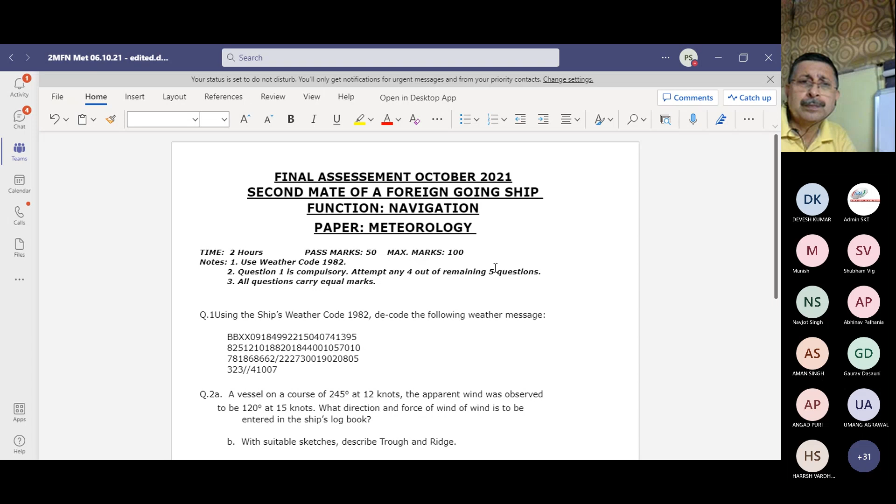So what you'll do is in your exam, you will click on this once, just one click, and your paper will open up. Like this. Can you see the paper? Yes. Right. Yes, sir. So, okay.

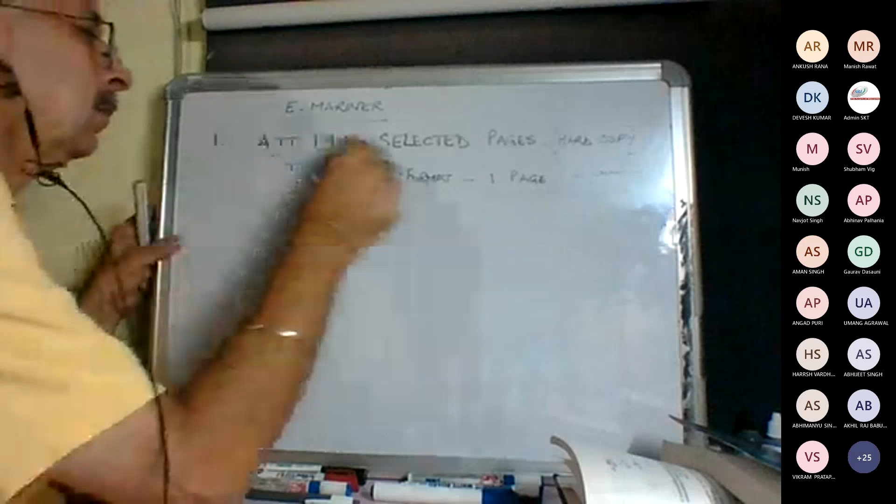Okay? Is that okay with everyone? Yes, sir. Anybody has any doubts or anything? Anybody any questions to ask? Please feel free. We have about 5-10 minutes to spare, so we can spend that time on some discussion in case any of the October batch or September batch have any questions.

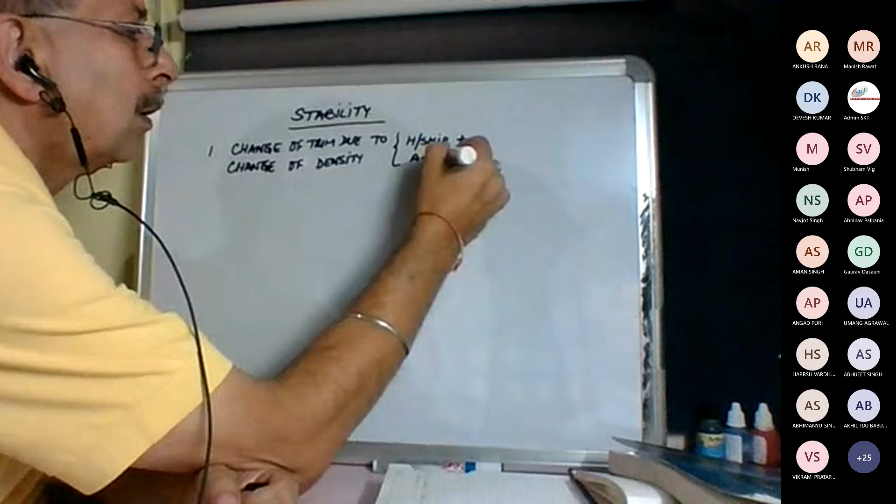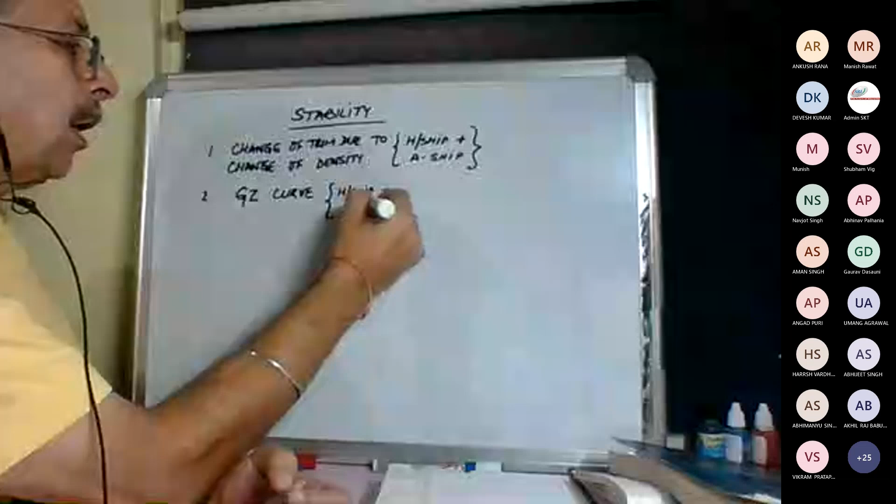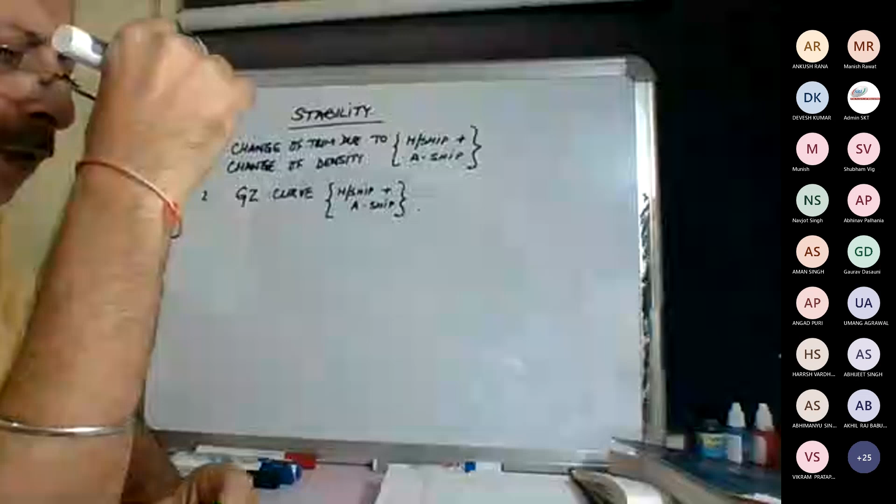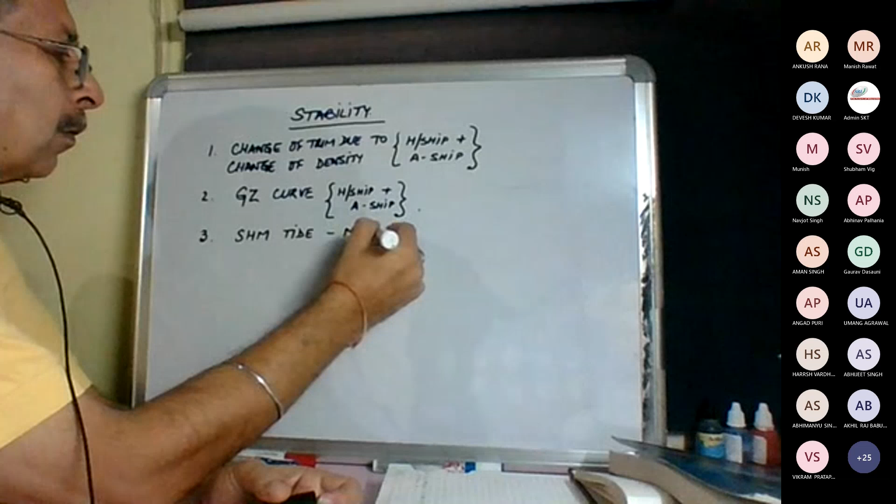And then we will have, in the MET paper, the SHM tide topic. This will come in the MET paper as a compulsory question.

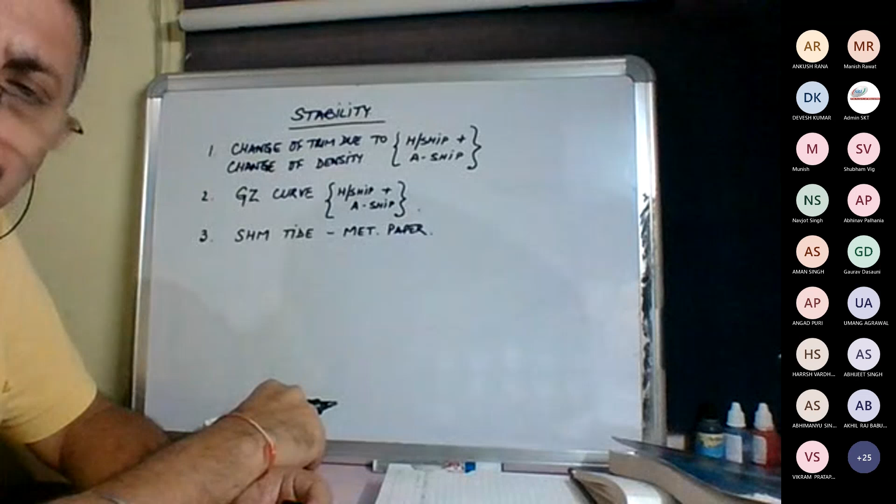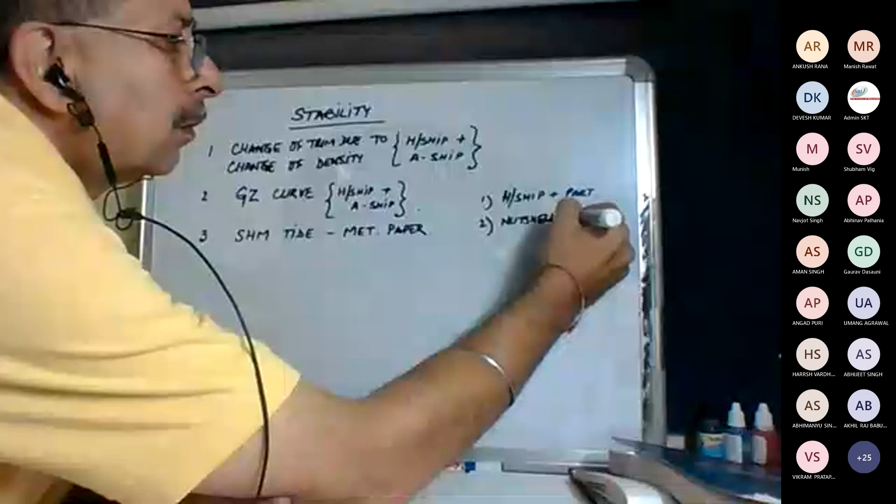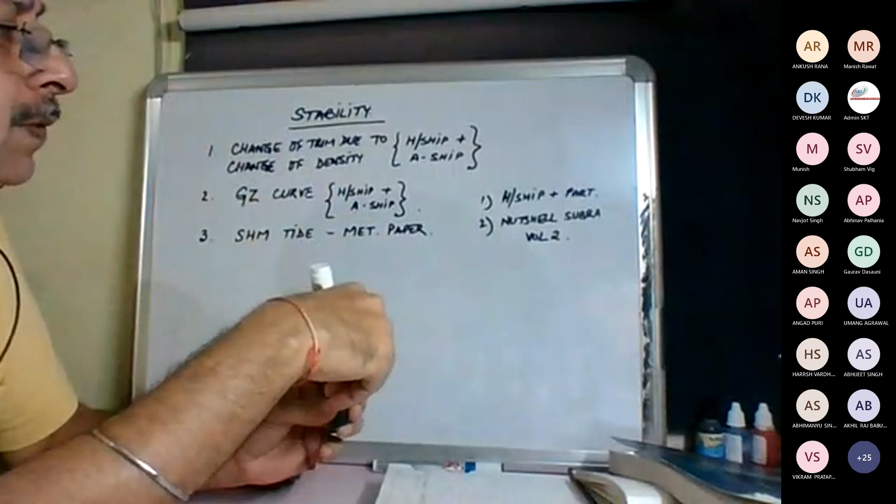These are the books that you need. Keep writing the notes as I keep giving you for both of them - I'll be giving you the notes. For Tide also, I will be giving notes. So this is how we are going to follow the sequence.

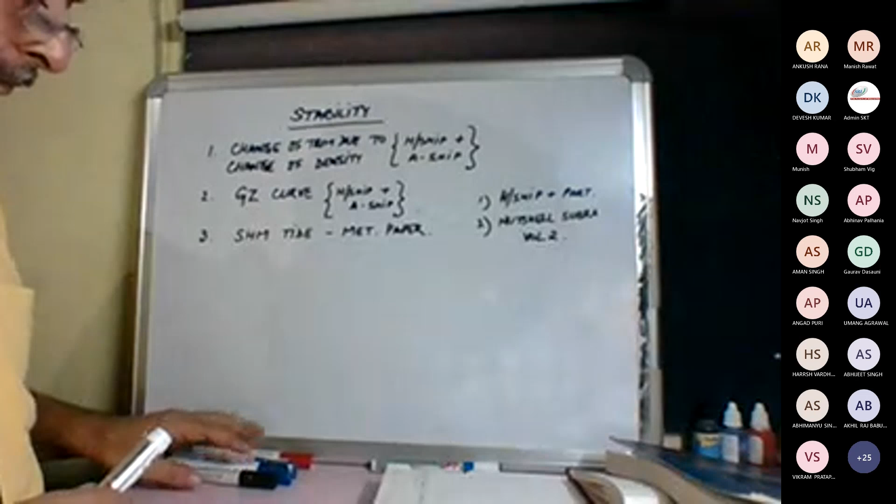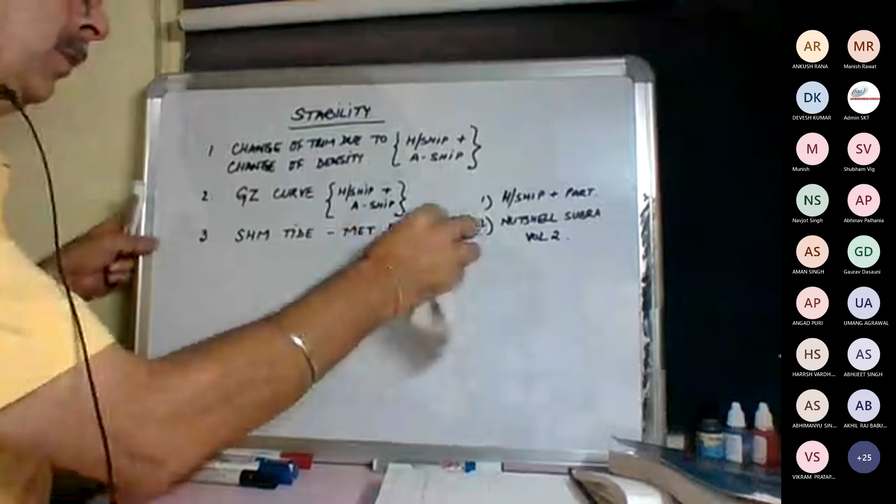Anybody has any queries in this? It's all okay? Okay, so let us start with A-ship.

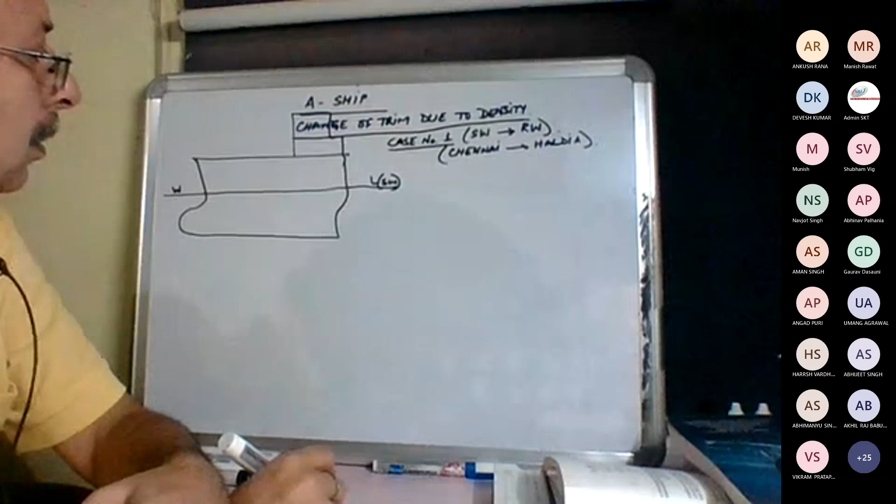Now I just put this ship at Haldia. So what will happen to the new water line?

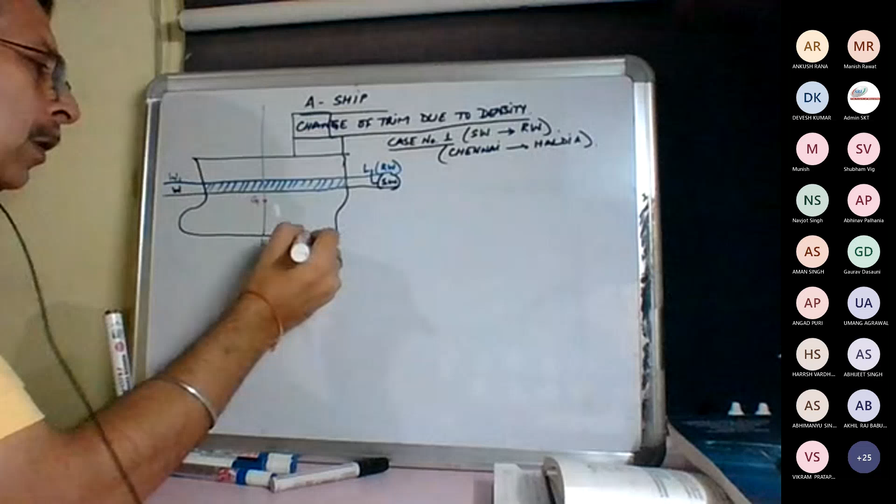This is the keel, and let us say this is G, and this is B. So B is the center of buoyancy, G is the center of gravity.

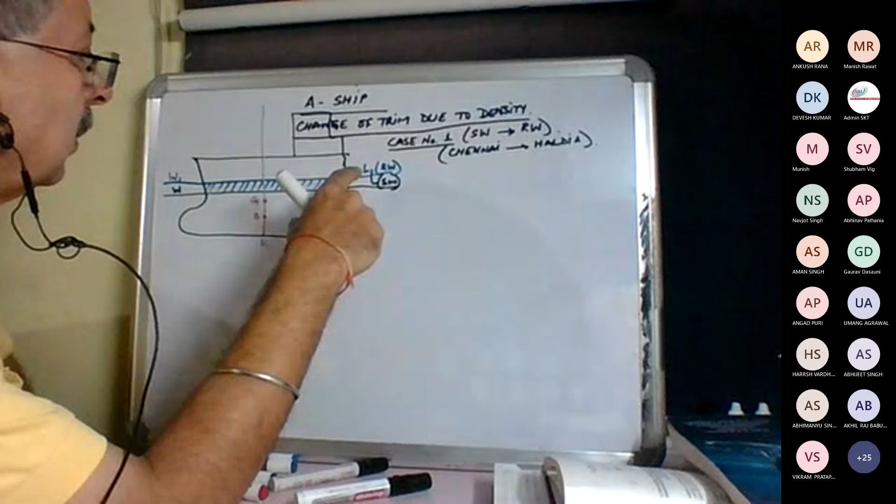So basically, I have a situation where the vessel has gone from Chennai to Haldia. The draft has increased, and because the ship has got a shape which resembles a water plane, something like this...

That means she is narrow forward, wide-bodied aft. So this is the water plane look, the top look. This is the bow, this is the stern. She's narrow forward, broad at the back. So whenever the sinkage happens, there is a change in underwater volume. The change in underwater volume aft will be more than forward. Do you all agree on this?

Yes, sir. So therefore, the new center of buoyancy will shift to B1, which will be above Bravo, but aft of Bravo. Do you agree?

How is it now? Okay sir, okay for the moment, loud and clear, sir. Okay, chalo.

So Bravo has shifted to Bravo 1, aft of and higher than Bravo. And now, therefore, what will happen is through G, the W was acting vertically downward because the displacement of the vessel was W, capital. That was acting through center of gravity vertically downward. The equal and opposite force of buoyancy will act vertically upward through Bravo 1. So this is your force of buoyancy, also equal to W.

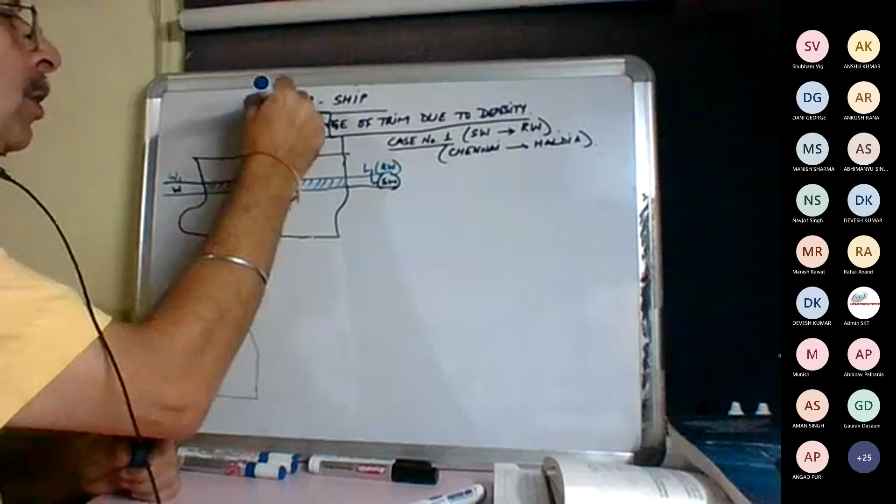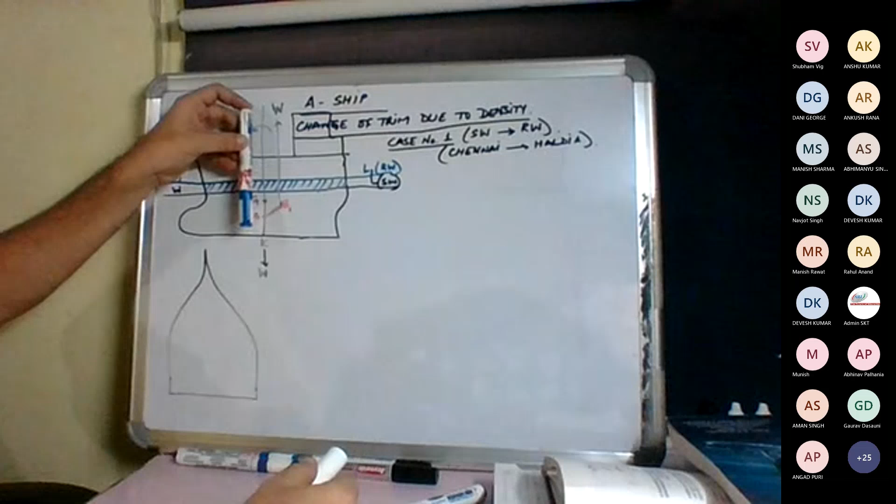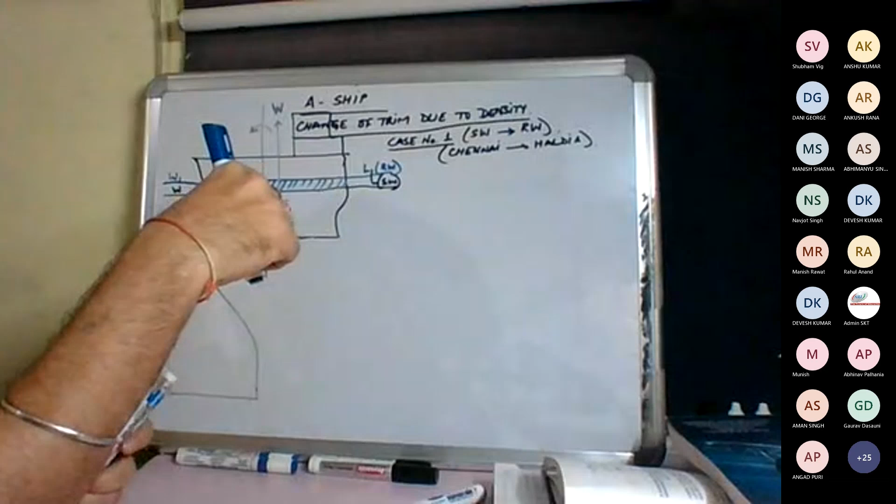So now you've got two forces. W acting vertically downward, and another W acting vertically upward. So a turning couple is formed. And that couple takes the shape of a trimming moment. So W displacement is acting vertically downward like this, and a force of buoyancy is acting vertically upward like this through Bravo 1. So a turning couple is formed. This turning couple takes the shape of a trimming moment, and therefore it will start to trim the vessel by head.

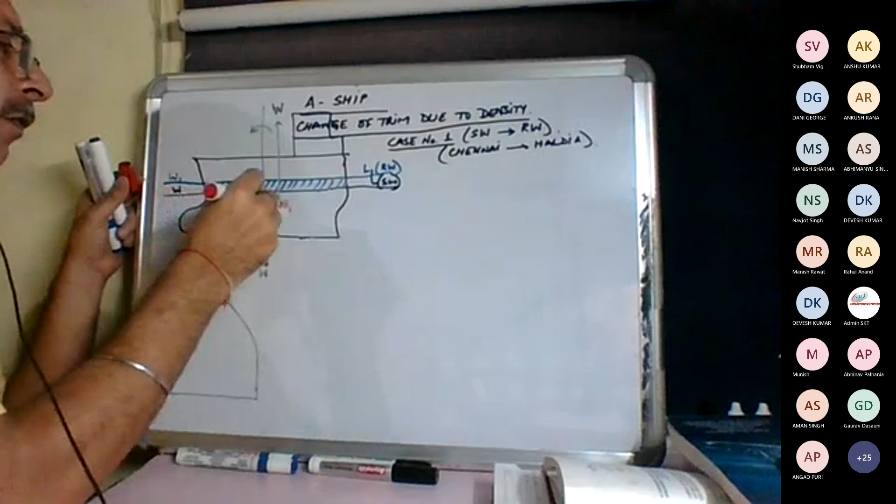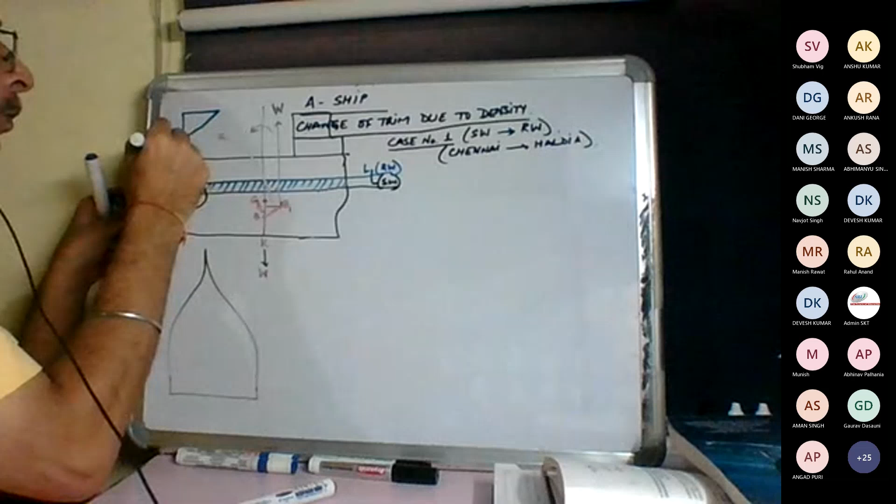And as the vessel keeps going down, Bravo 1 will start traveling, and will come to Bravo 2, till it comes vertically below Golf. If I magnify this diagram, this triangle, the magnification will look something like this. This is the magnification of the triangle.

And so therefore, Bravo 2 becomes in one vertical line with Golf, and the vessel will be again in equilibrium. And the vessel would be down by head in the final condition. Vessel would have a trimming moment by head.

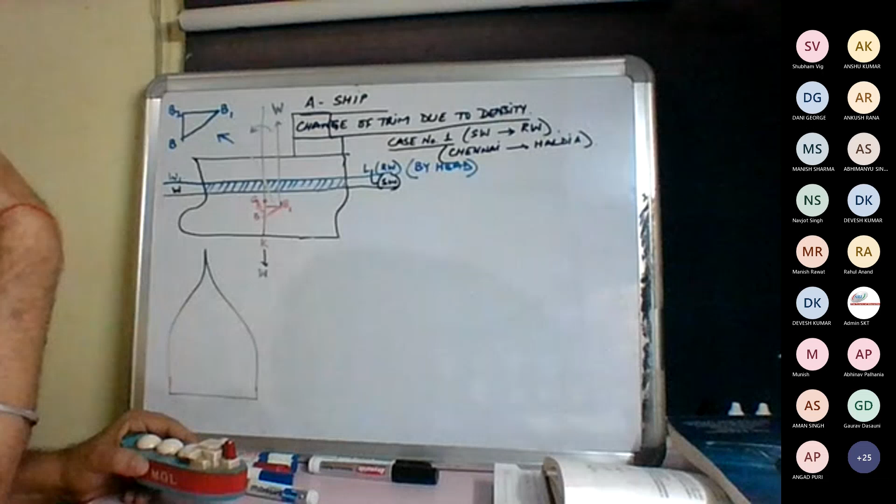B2 is the final position of B1. So the B has actually traveled from B to B1, and then B1 to B2. So the B has traveled like this and then like this.

So we are resolving it. In reality, we know it travels longitudinally, but there's a vertical component to it and there's a longitudinal component to it. So we are resolving that.

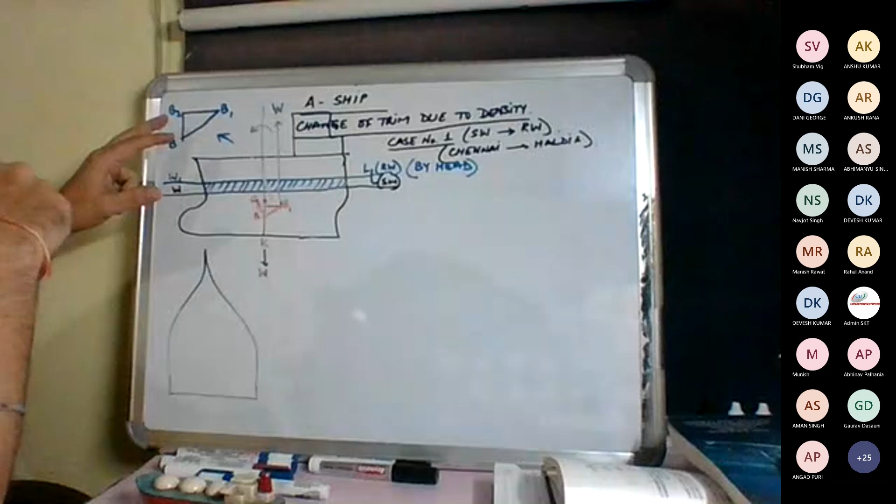Sir, right now B2 is at point G. No, it's below G. B2 and Golf are in one vertical line.

I'm talking about that now. Okay, is that okay? Yes, sir.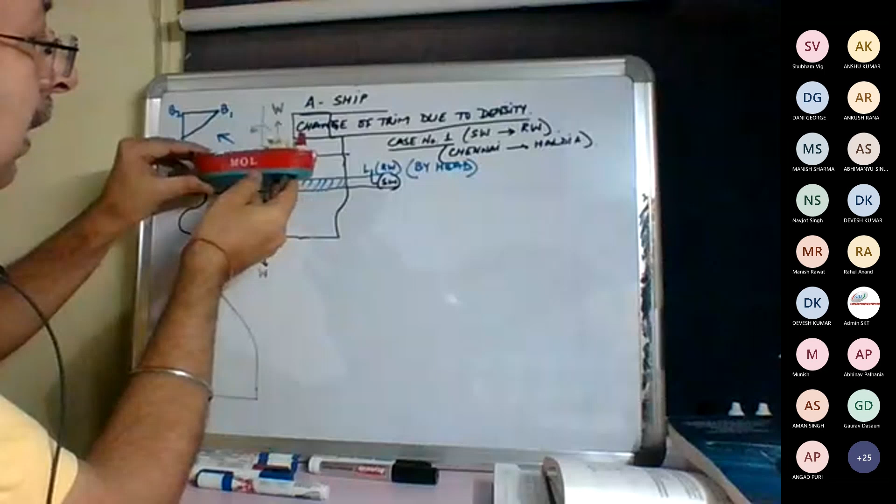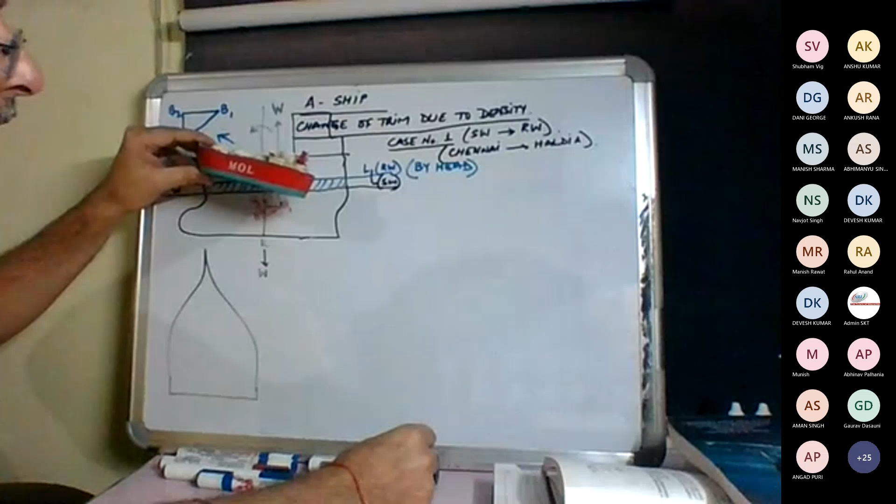Suppose I left Chennai by stern trim, yes sir. Then, depending on the quantum of my trimming moment, I could have arrived in Haldia with a lesser stern trim, because my bow would have gone down, but not so much. Poori trim khatam nahi hui.

So if my initial trim at Chennai was very large, then I will arrive at Haldia with a small stern trim. Is that okay with everyone? Yes. Yes sir.

Does everybody agree on this statement which I made? Yes sir. Anybody who has not understood this statement? Sir please repeat, the voice cut, it was getting stuck in between. Okay, so can you please repeat?

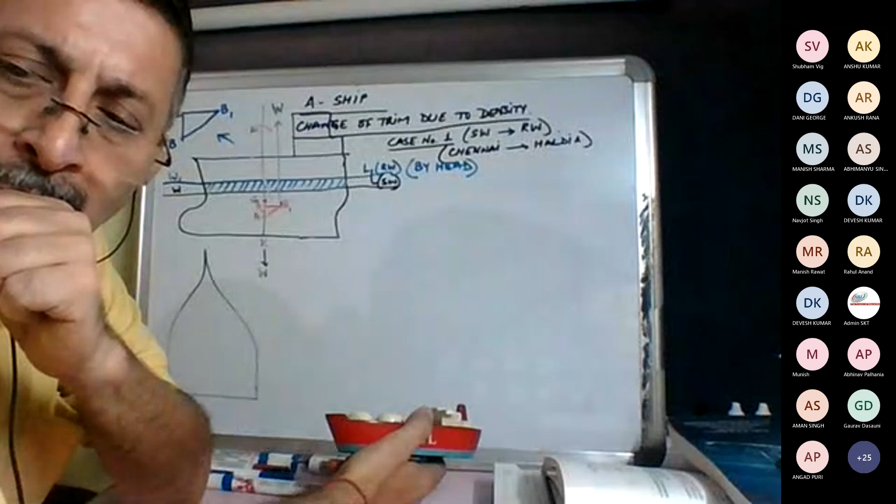I sailed out from Chennai with a large stern trim. Then I will arrive Haldia with a smaller stern trim. Okay sir, is that okay with everyone? Yes sir. So that's what I was trying to say.

If I leave Chennai in a down by head condition, if I leave Chennai with a trim down by head, when I arrive Haldia, I will be more down by head. Do you agree? Yes, sir. Yes, sir.

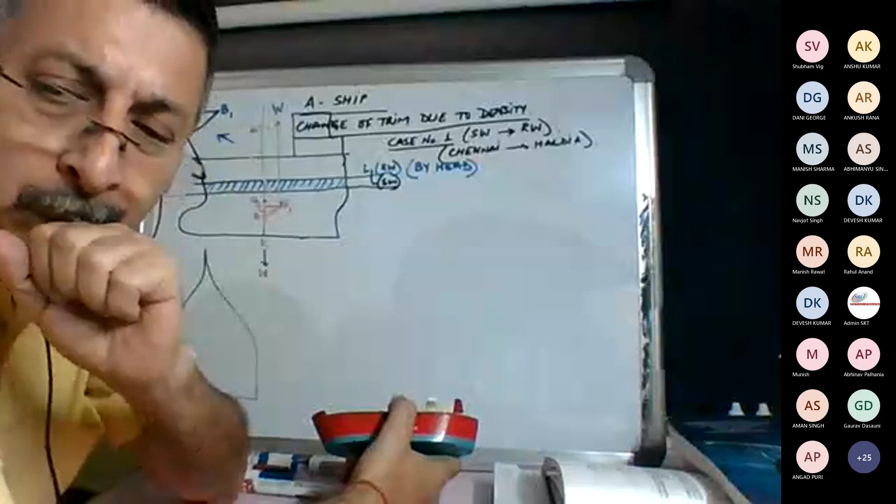This is the concept which I wanted to explain. Anybody has any questions so far?

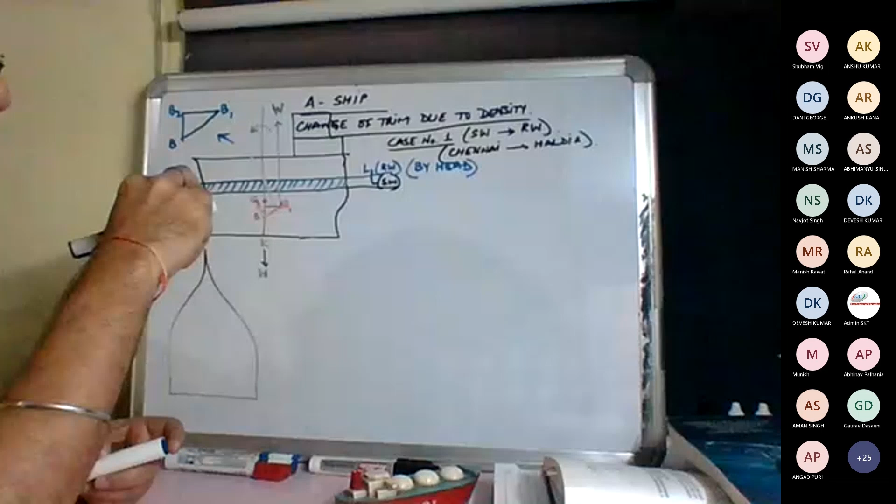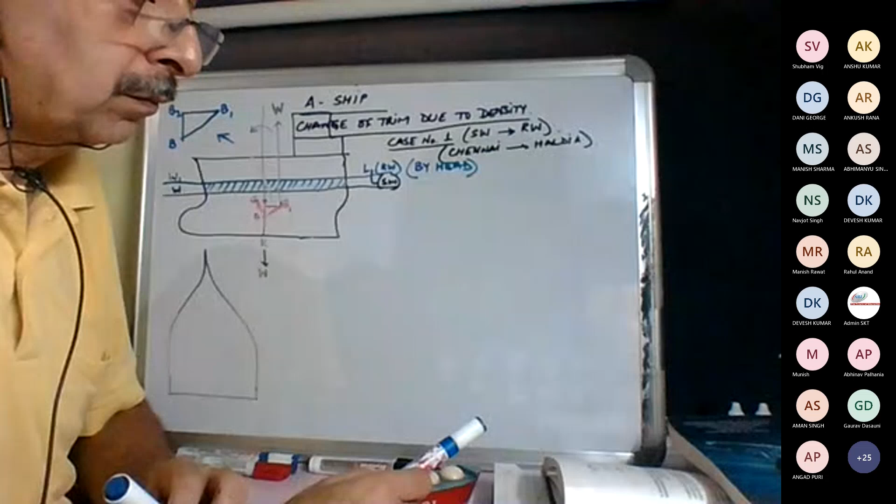That's what I was trying to say. Is that okay? So let's write this down.

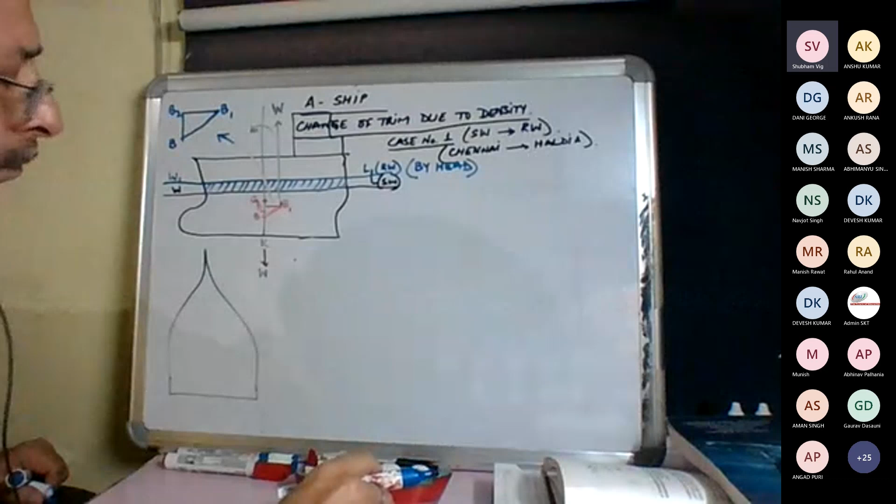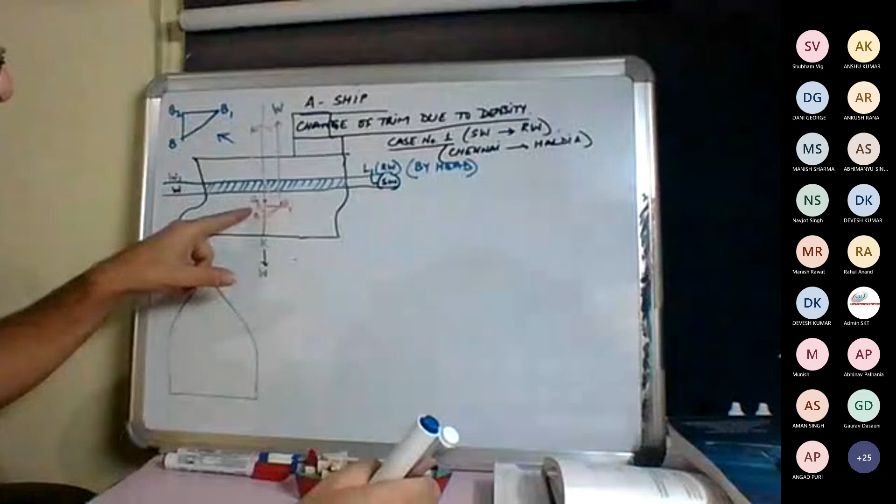Bravo 2 will be vertically below Golf, and above Bravo.

So that means if B2 comes below G, the ship becomes... she is in stable equilibrium, not even keel. Don't bring even keel into the picture now. She is in stable equilibrium. See, she became unstable because she went from saltwater to river. The B went to B1. Now B1 has to come back below G so that the vessel can be in equilibrium. Let's put it like this. Is that okay?

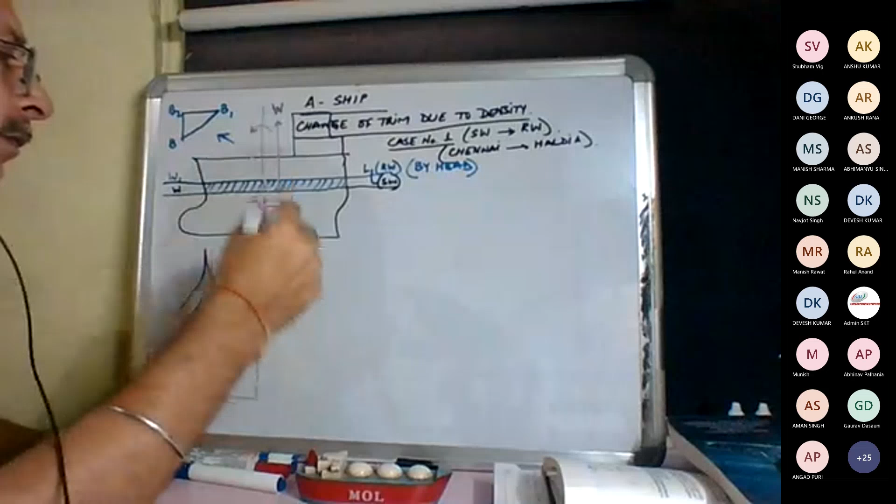So let's write down all this, whatever we have discussed. Let W be the displacement of the vessel. Please write it down. Let rho S be the density of seawater. Let VS be the underwater volume in seawater. Let G be the COG of the vessel. Let B be the COB in seawater.

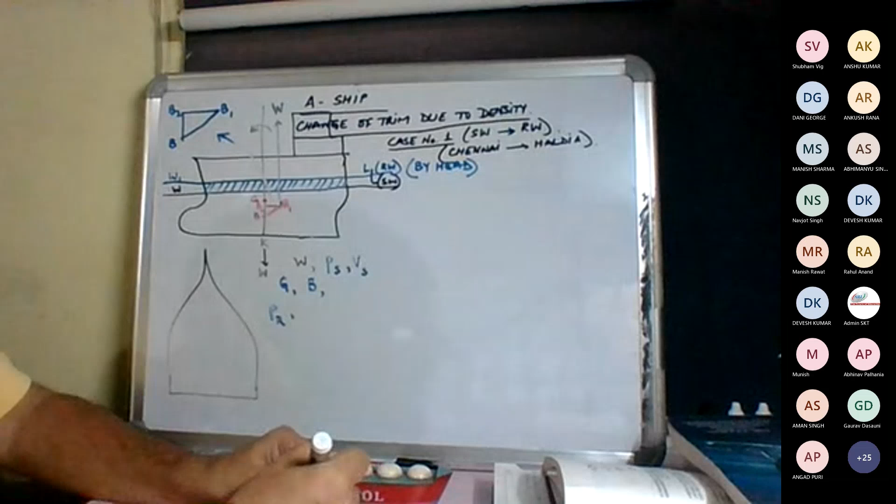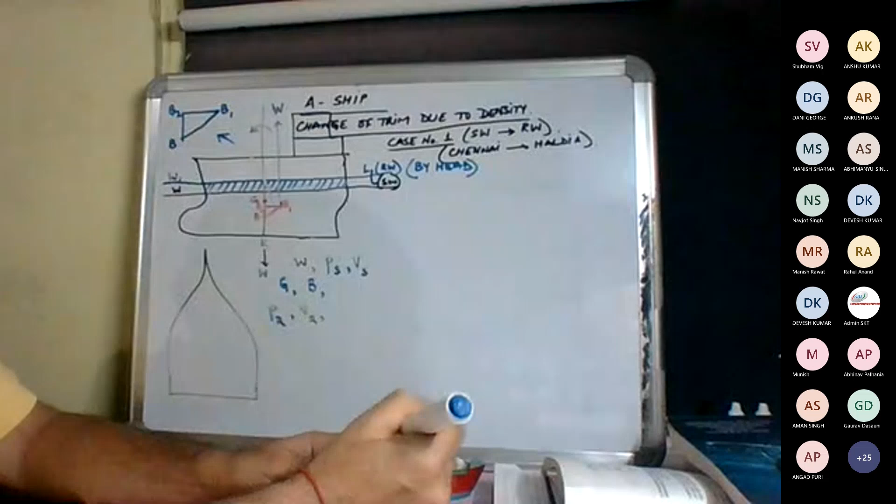Let rho R be the density of river water. Let VR be the underwater volume in river water. Let B1 be the COB in river water. So let us start. VS is equal to W upon rho S. VR is equal to W upon rho R. If there's anything you're not understanding, please ask me. Okay.

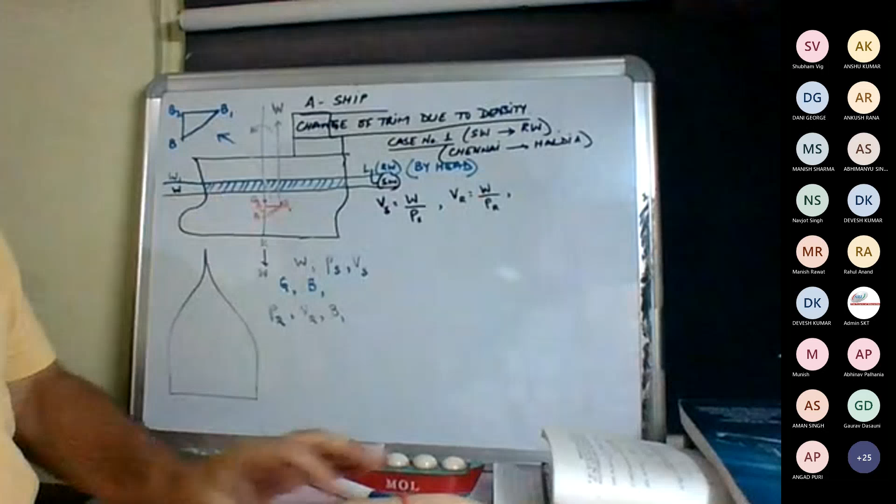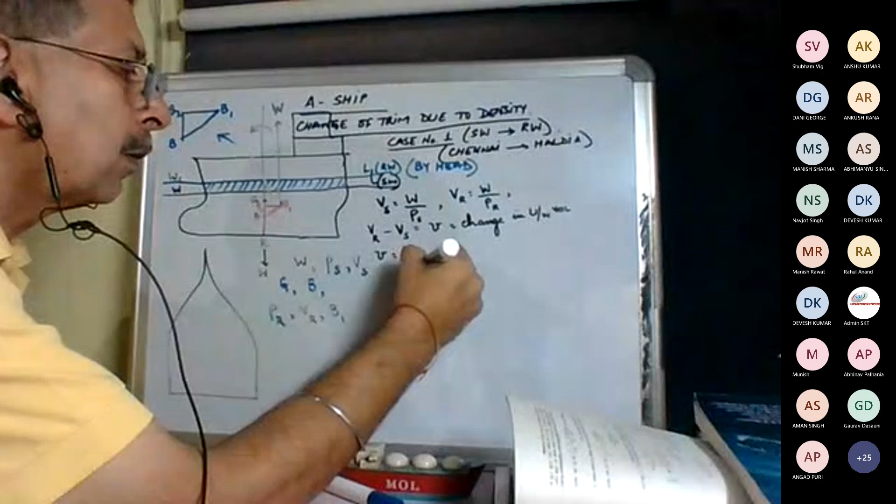Which is more? VR is more. So VR minus VS will give you small v, which is the change in underwater volume. So small v is equal to W upon rho R minus W upon rho S, which is equal to W taken out, times 1 upon rho R minus 1 upon rho S, which is equal to W into rho S minus rho R upon rho R rho S.

By another formula, we have BB1 is equal to small v into FB upon VR.

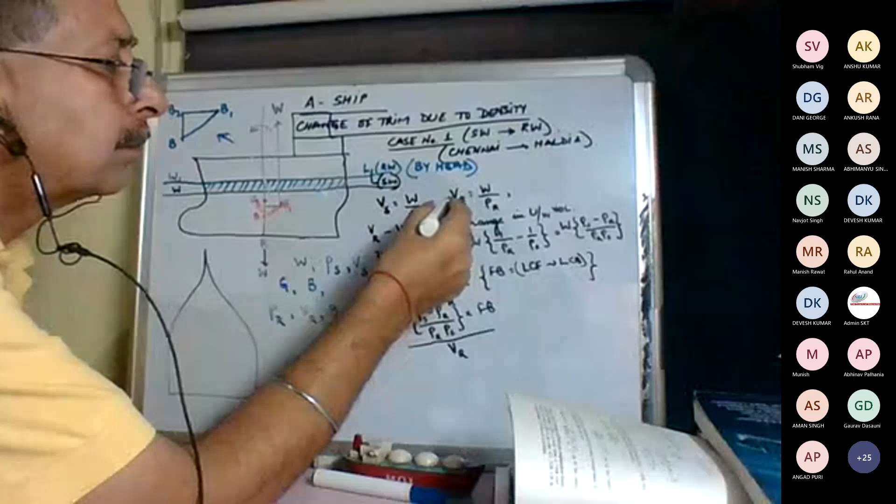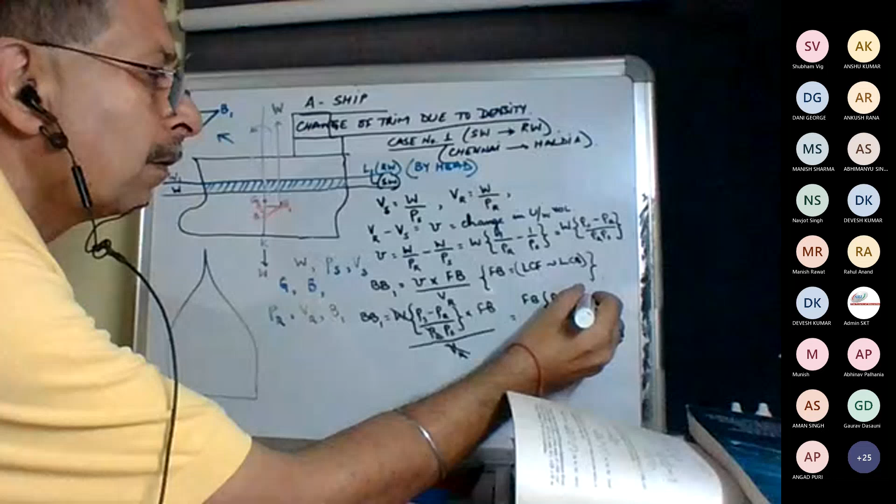So if I put this formula of small v into this, I get BB1 is equal to W into rho S minus rho R upon rho R rho S into FB upon VR. Are you with me on this? Yes, sir. Okay. W upon rho R is equal to VR, so VR and VR cancel. So what do you get? FB into rho S minus rho R upon rho S. Do you agree on this? Yes, sir.

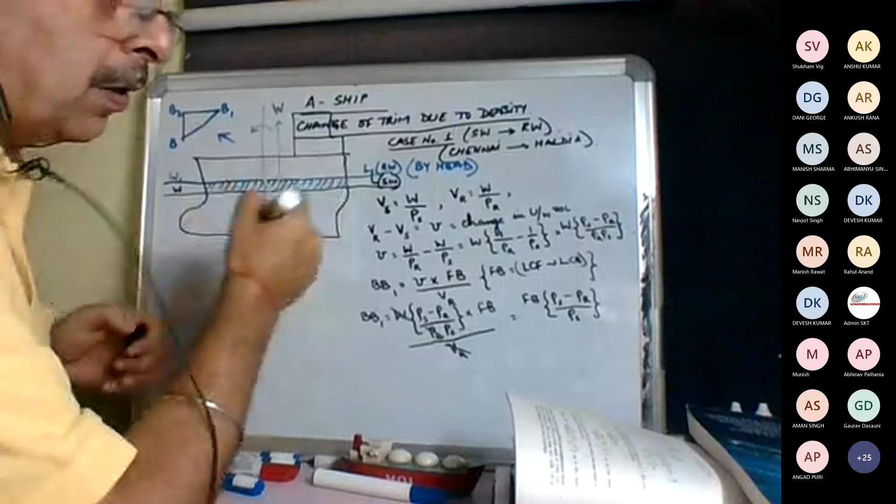Now, the trimming moment which will be caused will be the force, which is W, into the lever through which it is acting, that is BB1. This will be the trimming moment by head, that is W into FB into bracket rho S minus rho R upon rho S, by head. Okay?

So therefore, the trim change or trim caused is trimming moment upon MCTC, which is equal to W into FB upon MCTC into rho S minus rho R upon rho S. This becomes by head, and this is my formula for case number 1. This gives me my TC, or trim caused.

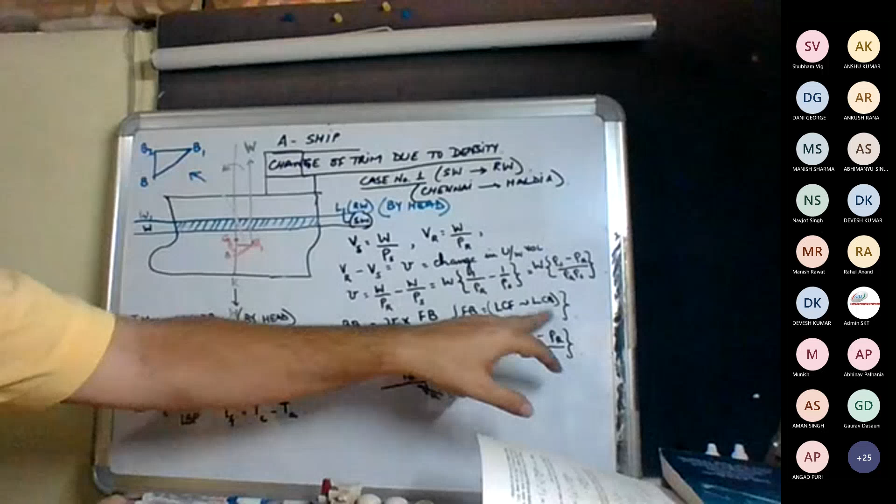And sir, this TC we have calculated, this is by head. This is by head. Okay, sir. So then we calculated TA, then we calculated TF. ठीक है? Next class I will resume from here and I will go on to mean sinkage. So वो fresh water allowance and dock water allowance तब use होगा। ठीक है?